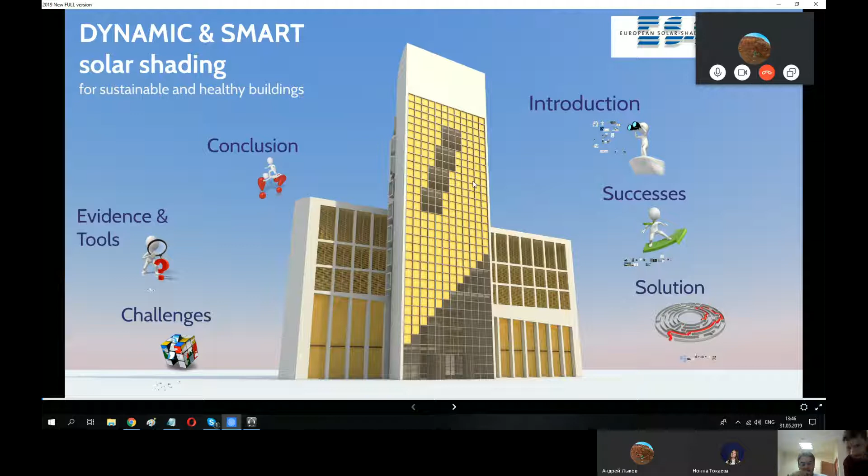Is it better now? Okay, so we good to go? Yes.

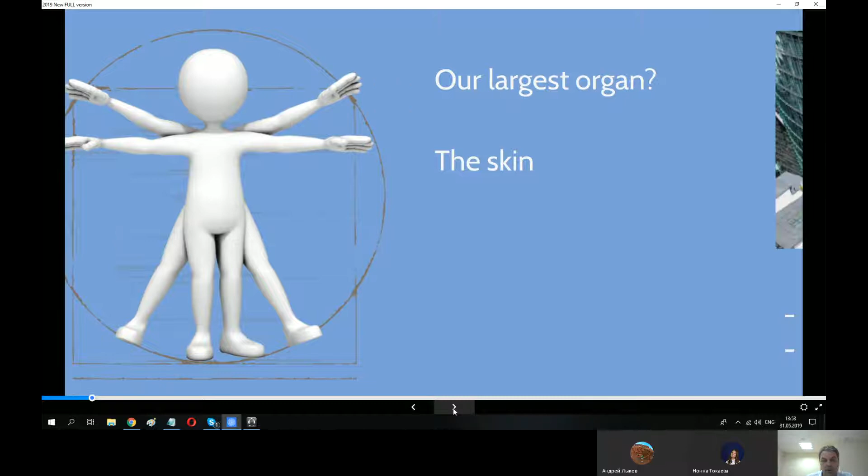So why do I mention this? Well, to me there is actually a parallel to buildings, because we build a lot of buildings and create a facade—a skin on that building—based on fixed scientific values, with minimized flexibility for that facade to breathe.

This is my line of thinking, that very often people think the building skin just protects from the outside or keeps warm, something simplistic like that. But this is actually something that goes on every hour of the 24 hours, and the seasons are different. We have cold periods, we have hot periods. So the need for how the skin of the building should react varies a lot, yet very often it's more or less a static skin.

You see the smaller illustration in the lower corner. In Scandinavia, where I live, they go crazy now about building houses that are totally airtight with thick insulation, and the heat source should be appliances and body heat and maybe a couple of candles. Houses built for 2 grown-ups and 2 children. Then you need machinery to be able to breathe. You rely on technology to breathe.

That might be all fine normally, but then it's Christmas or midsummer celebration and you have 10 relatives coming over, and all of a sudden the house becomes a sauna and you're all overheating. Overheating is actually finally recognized in Europe to be a much bigger problem than keeping warm during winter. So overheating is the new big ghost we have to fight in Europe, and we can play an important role here.

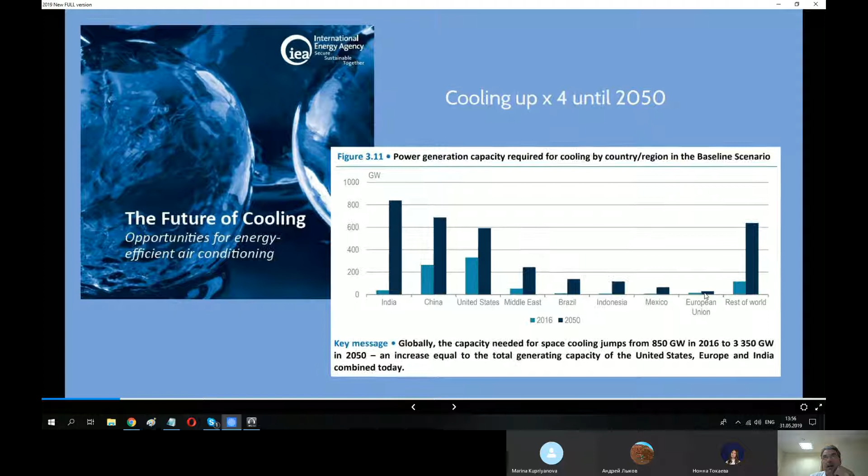Let's see, here. You will see that total energy for cooling will quadruple until 2050, but it's divided across different areas of the world. China is crazy, India is crazy. Europe looks quite good in this table, but if you look closely, I can zoom in a bit, it's actually more than double just to keep cool during the summer period. And that's a lot of energy.

Huh? Yeah. There are some people... Okay. Yeah, sure. Yeah, to you. Yeah.

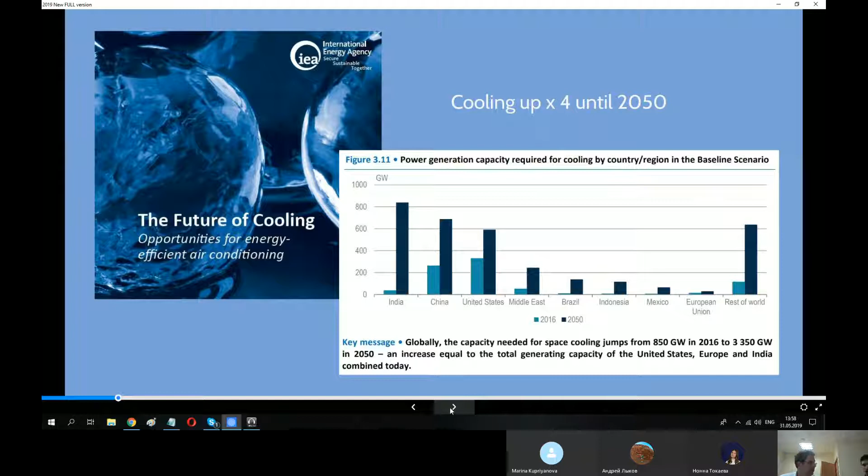I have been engaged in energy efficiency connected with solar shading for years now. When I started, it was a lot about building physics, how to save energy. I have also, together with you I am sure, experienced a strong shift to the understanding that the cost of people is so much bigger. Driven by these systems and the introduction of WELL certification, cost and the well-being of humans have come into focus very positively.

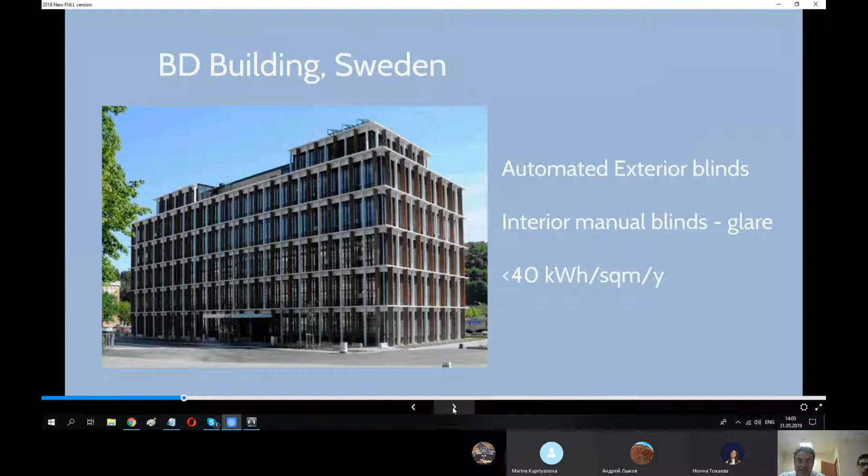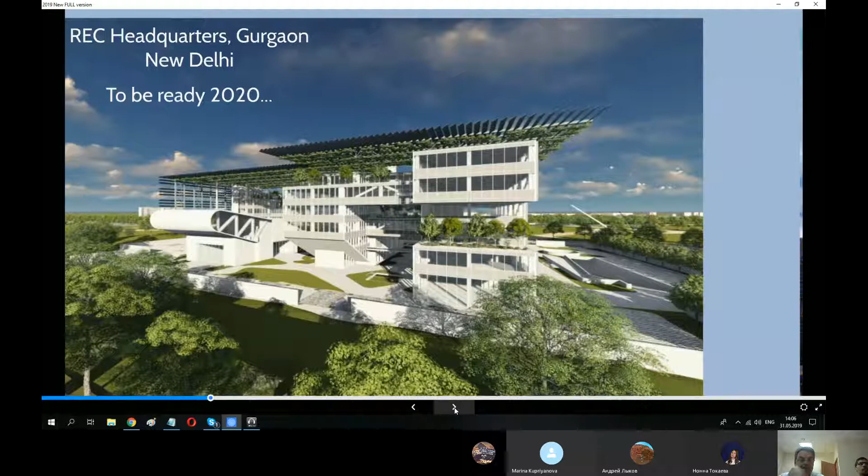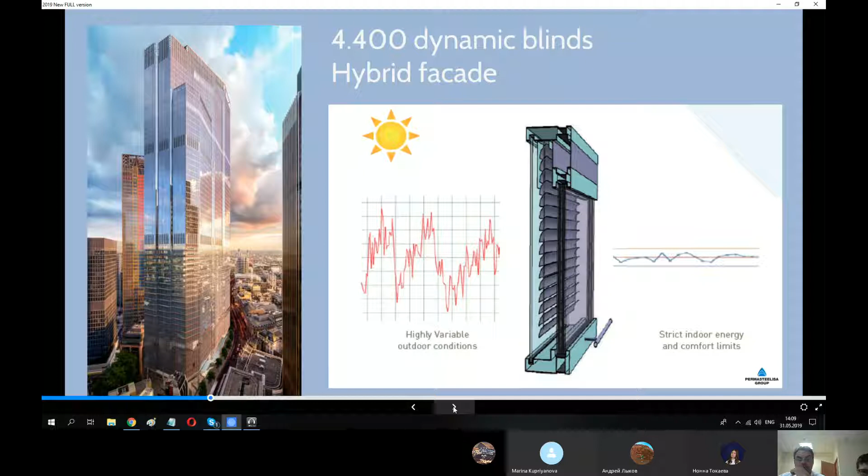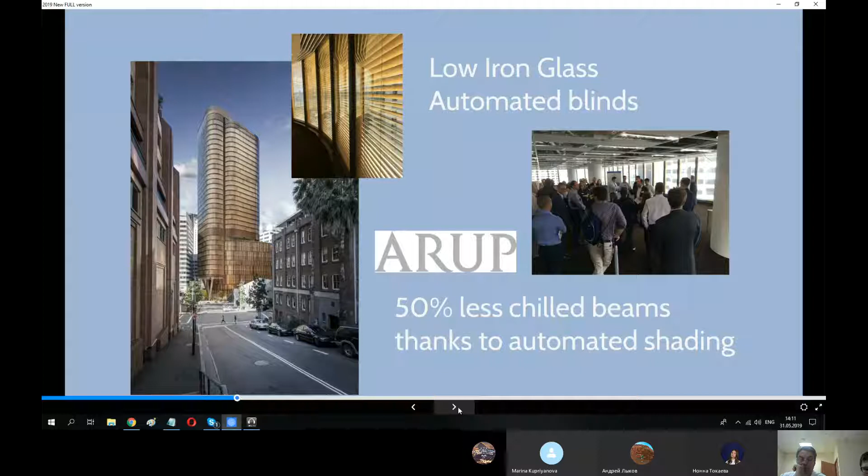Да, вот уточнение еще: то есть климатические балки на охлаждение, то есть системы холодных потолков, подачи воздуха, и соответственно нагрузку системы жалюзи снизили, и количество балок, мощность этих балок сократили в 2 раза.

CIBSE Journal is a British magazine around the real estate world, and recently, in March, you can find this online as well, free to download. They wrote a 5-page article about the building in Australia in this magazine, and for you as consultants, there is much more to the story in that article that I recommend reading. It's about soft landing, which means responsibility after completion, to follow up and adjust the building when it's brought to life, and things like that.

Организация инженерная британская CIBSE выпускает журнал. Этот журнал можно скачать бесплатно в сети интернет. И есть номер, который посвящен вот этому зданию, в котором показано, как работает это здание уже в процессе эксплуатации. Представлен этот кейс, который очень полезно почитать для консультантов и инженеров.

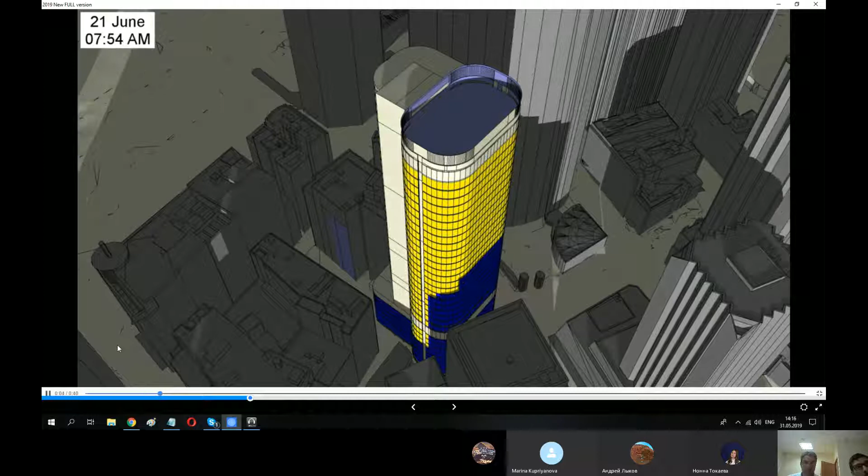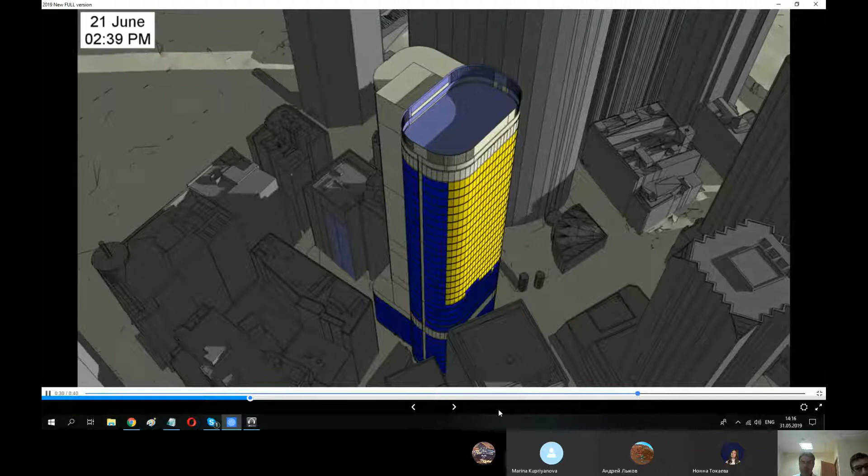Здесь показан пример, как программируется система управления жалюзи динамическими. То есть изначально строится модель окружающей застройки, модель затенения солнца, и ставятся несколько датчиков в верхней части здания, которые уже управляют всеми системами в этом здании, всеми жалюзи. И не нужно ставить датчик на каждом жалюзи. При этом, если вдруг появляется рядом новое здание и новая тень, то они могут сделать дополнительный анализ и обновить программное обеспечение по затенению здания.

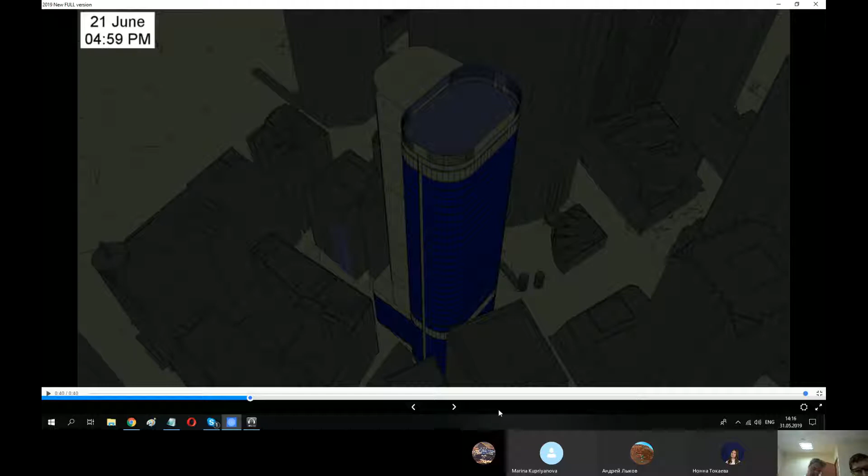And we stay in Sydney and just move a little bit to the side. Here is another building, like a little jewel in the city. It's actually animated, but it looks very much like this in reality as well. At my latest visit, it was rated Green Star 6, which is the highest level of energy efficiency that a building can obtain according to the Australian rating system.

Еще один пример здания в Австралии. Вот этот рендер, который показан слева, но на самом деле здание похоже на реальность очень сильно. И это здание было сертифицировано по системе Green Star — это система сертификации зеленых зданий австралийская. Самое главное, что это здание получило наивысший 6-й уровень по этой системе с точки зрения энергоэффективности и других параметров системы.

What was interesting to learn when I met the architects, I asked them: we were not involved, but you still recognize dynamic solar shading as an important component in the package for the energy efficiency of this building. And I said, how come? I was interested to know. Mark Curson, the architect, looked at me and said, well, doing the pre-studies, it just became obvious to us. Because there is one more thing with this building I will show you on the next slide.

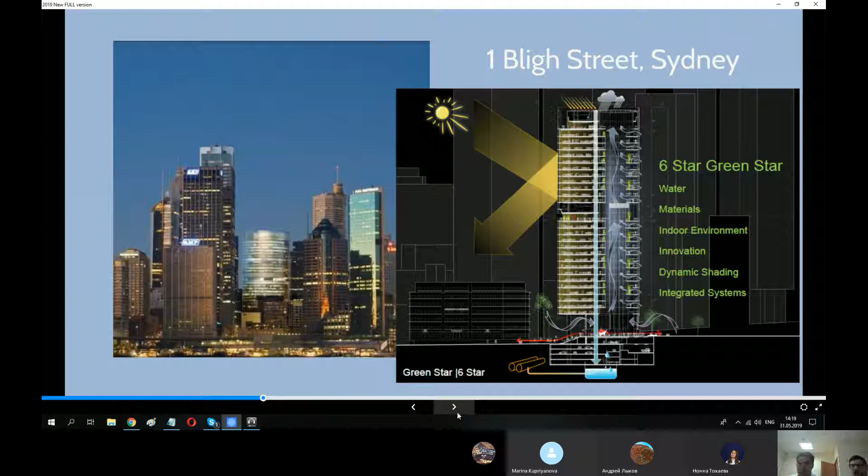And some illustrations. Yes, a double skin facade again, as I mentioned, but this was again dynamic solar shading. And here you can see some early pictures before people moved in. And every sheet of glass you see here, even the elevators, are made of as much low iron glass as possible to allow daylight, natural daylight, to flow through the building.

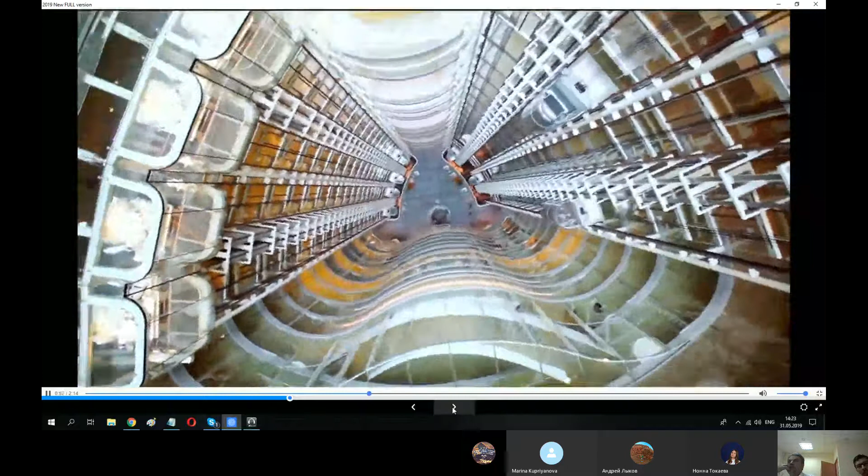We can stop there. At least you got a visual impression.

He was mentioning that here they talk about the daylight from the north because we're obviously on the southern hemisphere of the earth, but also how the atrium in the center of the building also helps bringing indirect natural daylight into the building in an amazing way.

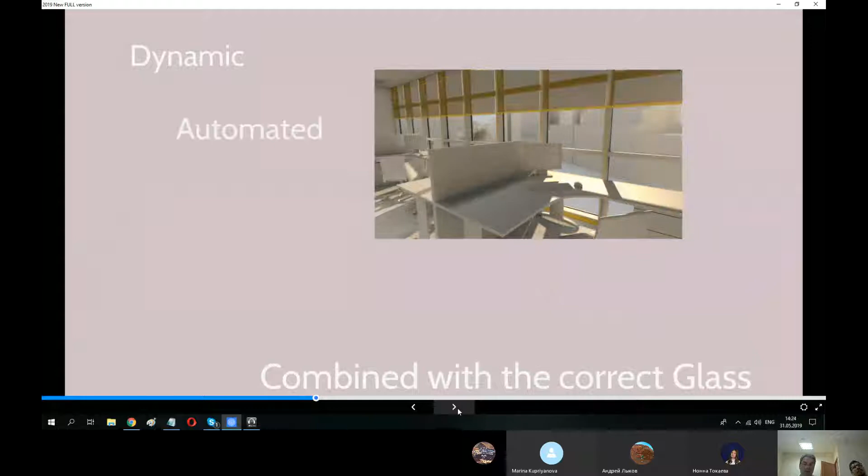Okay, so then promoting, I'm here to talk about dynamic solar shading. So let's take a closer look at that. I say dynamic, automated, smart behaving solar shading combined with the correct choice of glass. And this is very important.

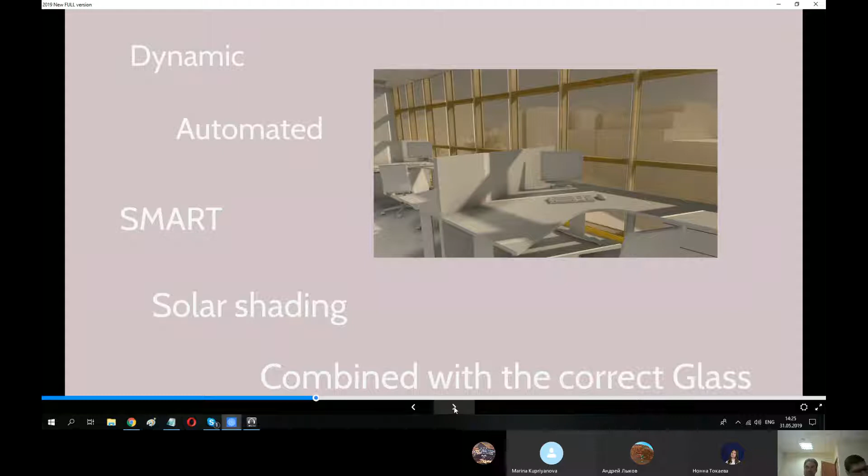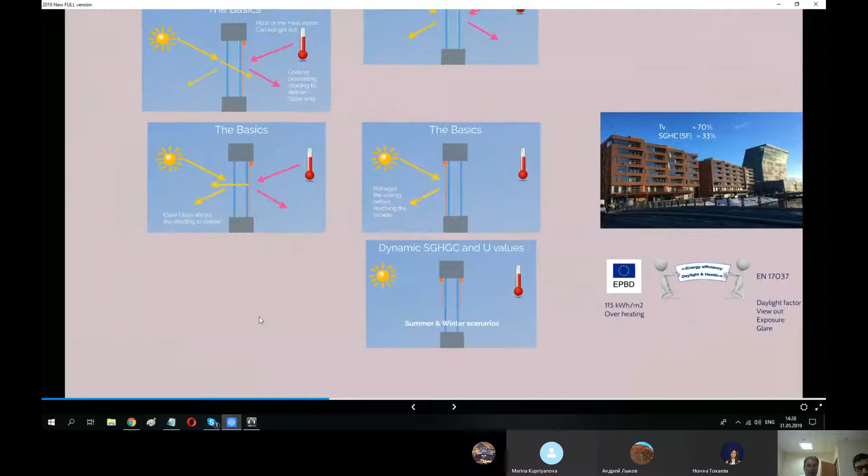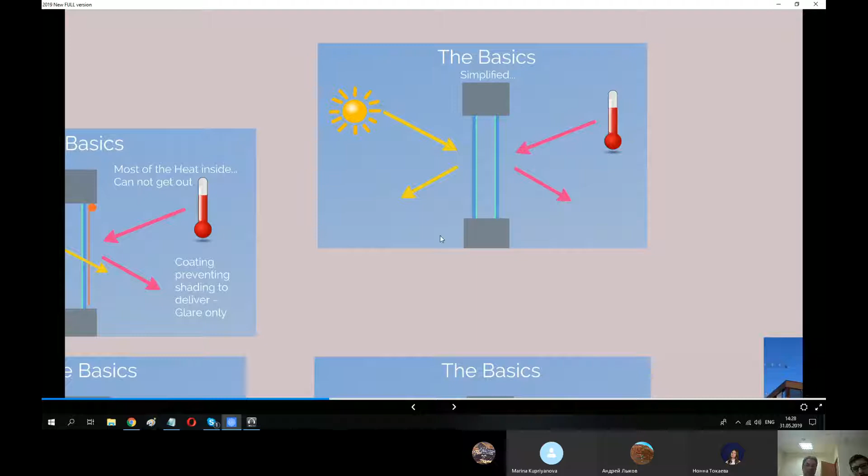We look at two things: what is now hitting the facade from the sun, the potential heating energy from the sun, and we also need to manage the heat that we generate inside a building. I will tell about the first one first.

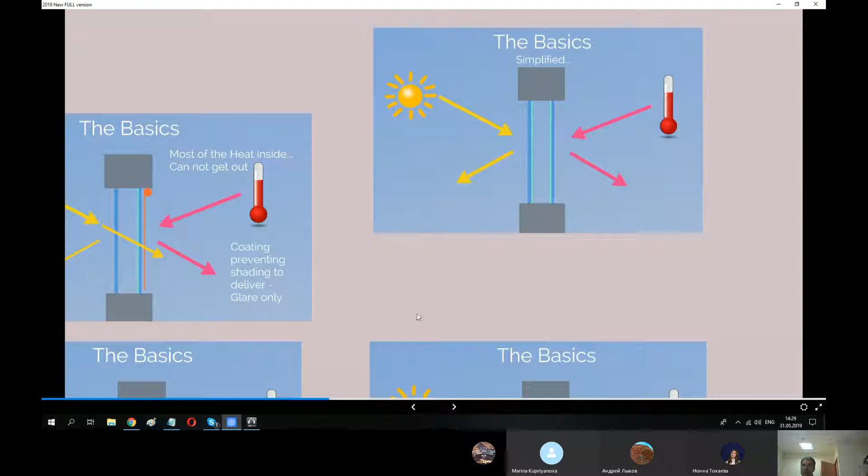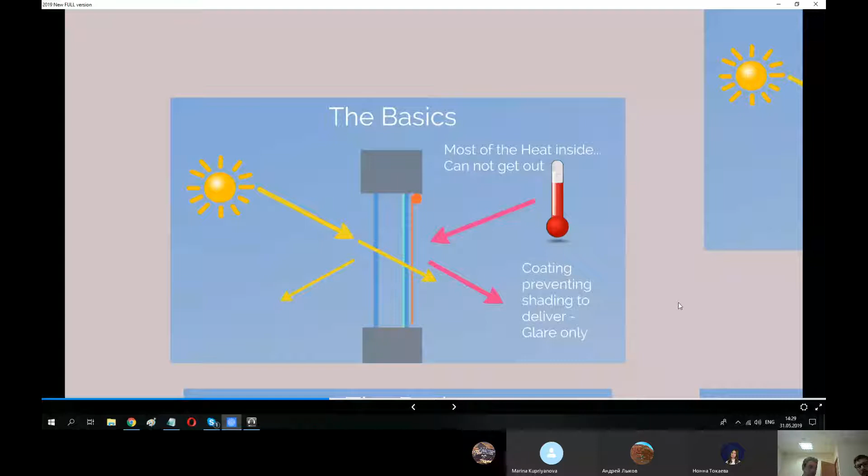So the next slide: what is happening very often, and I see it here in Moscow as well, I see it all over the world, is very greenish kind of glass with interior manual shading sitting up and down everywhere. What happens is the coating on the glass is designed to have a good U value and bring the amount of solar energy coming in down to maybe 25-20%.

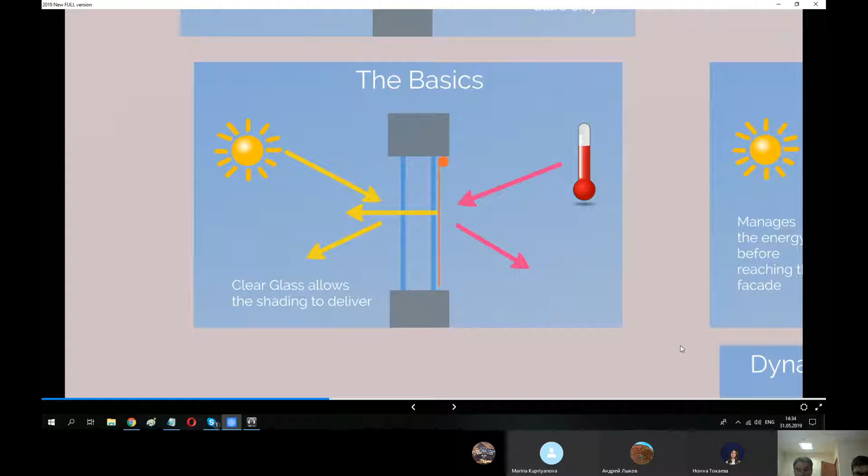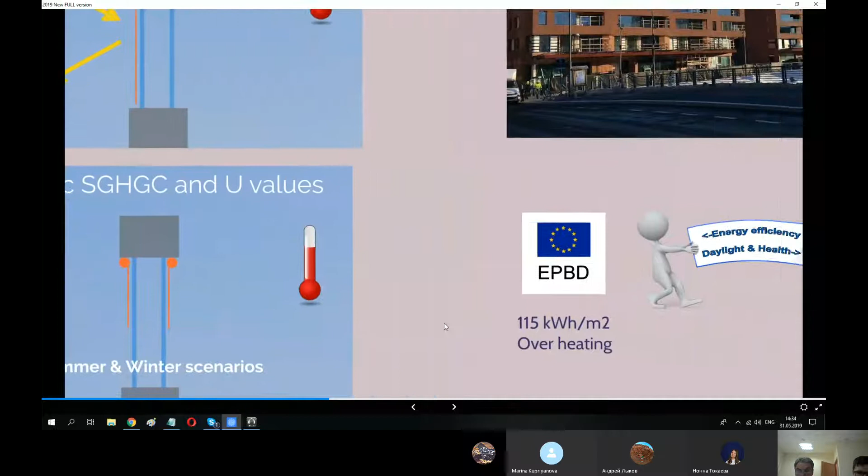So, not going deeper into that, but I can already mention that I will be able to provide you with free software we have been working on in Europe for the past 5 years. It's available in Russian, doesn't cost any money, and it will allow you very quickly to do early stage building optimization calculations on the glass and the shading, all calculated according to the international standards and norms available today.

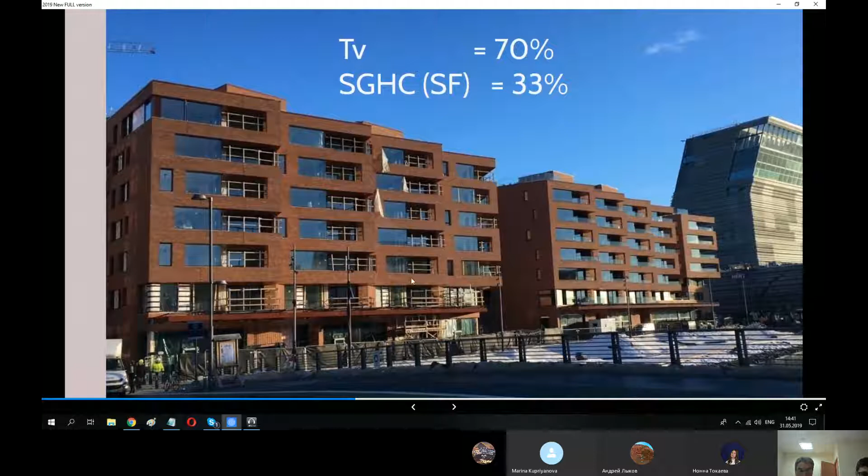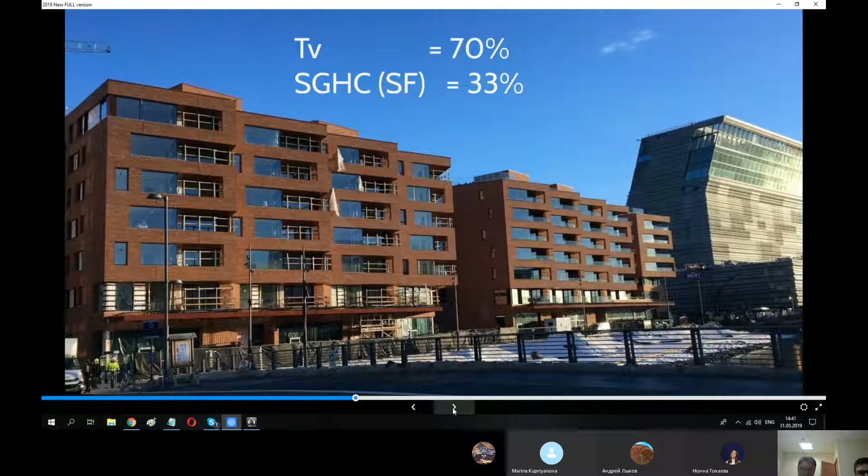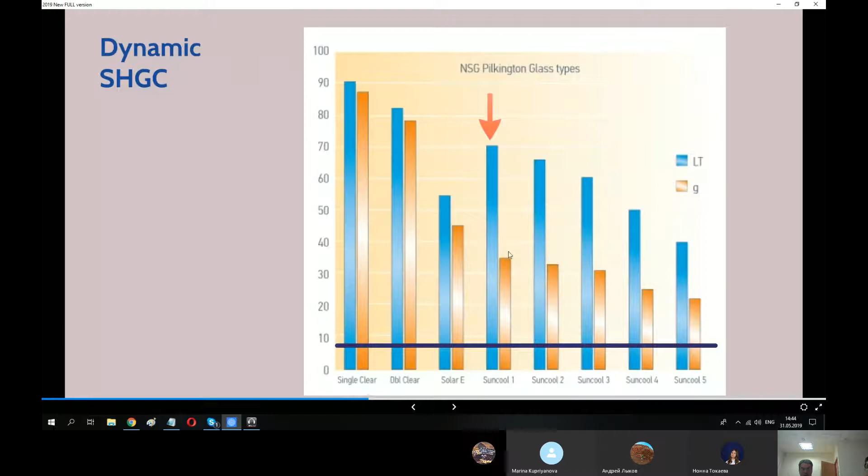This is when I say this is a smart choice of glass. You combine it with some kind of dynamic shading. You can allow the facade energy-wise to be open, but when you need it, you can shut it down during an hour, an afternoon, or one day, and then open up again.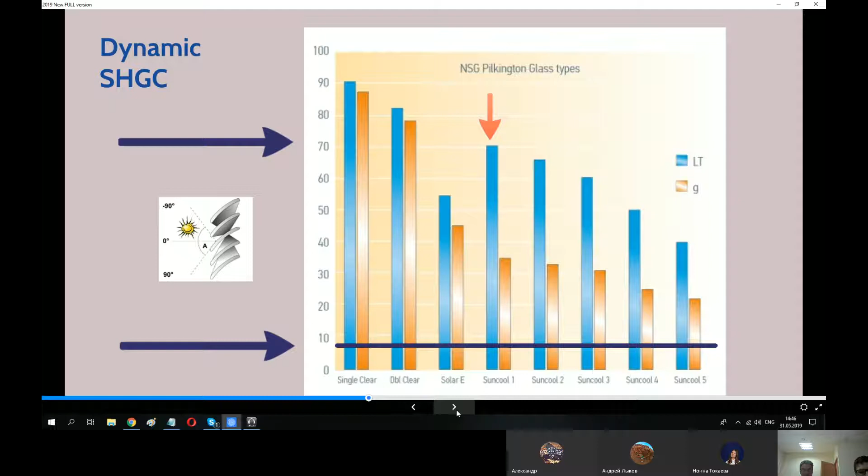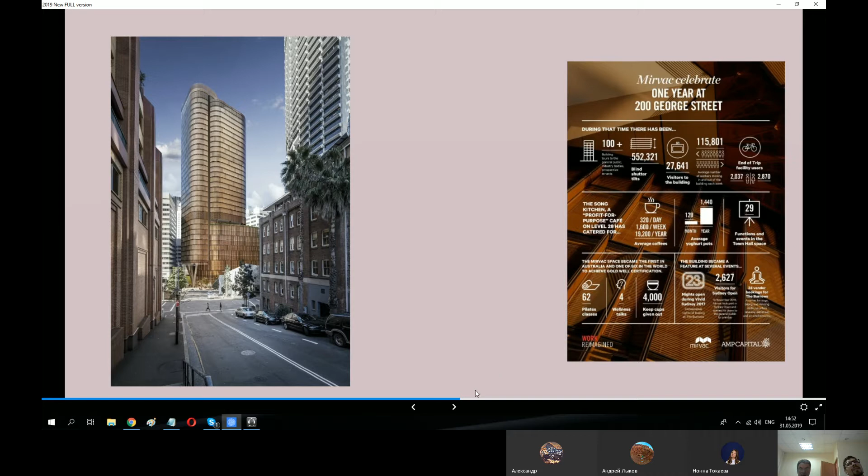But what we didn't know was that they were logging how many yoga sessions, how many cups of coffee, and everything. And here we have number of movements: 552,000 movements in a year.

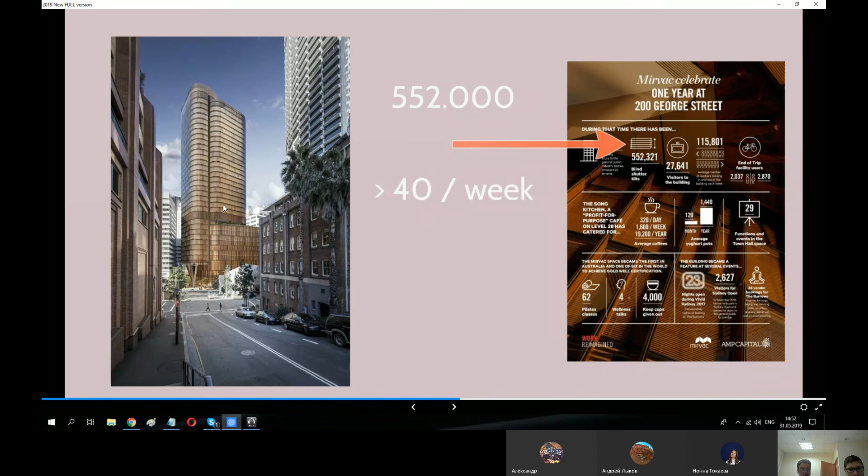So just to give you, and maybe now the sound will be a little high, there is only...